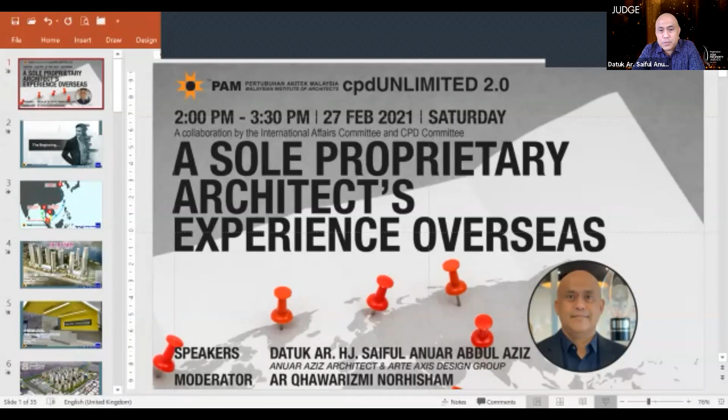Okay, thank you so much for the opportunity. I would have to say the opening remarks by Tan Sri Datuk Sri Isa is something we are all looking forward to, and basically you are our inspiration also in order to go overseas and open up our horizons. So I'll continue with the session. Basically, the topic is a sole proprietary architect's experience overseas. It might be a different experience because of the size and nature of the firm we are in. But let's start with the beginning.

The story behind how the projects came to us - we are basically based in PJ. The office has been in operation since the year 2000. Over the span of a few years, we were lucky to get the opportunity to move into a few countries within the ASEAN region. The first opportunity was in Phnom Penh, Cambodia. The second was in Qingdao, China. The third, which is currently an ongoing project, is in Mawlamyine, Myanmar. Unfortunately, with Mawlamyine, we all know what's happening in Myanmar at the moment, but we'll talk about that later.

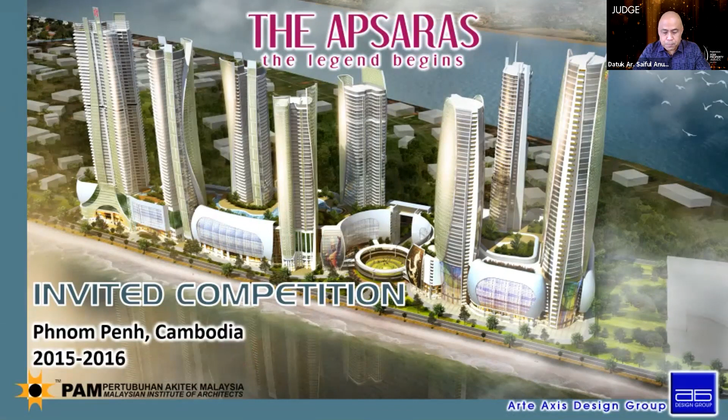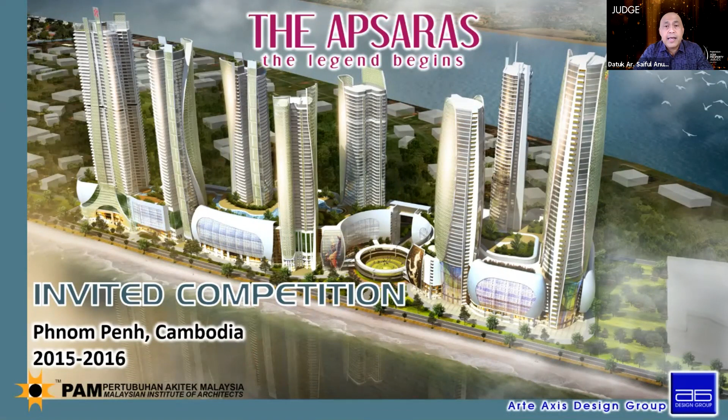How the project came to us for the first one in Cambodia is basically one of the most common ways foreign architects go into a country - by invitation to be in a competition. For this one, we were invited by the Ministry of Land Management, Urban Planning and Construction Cambodia, on behalf of Sokha Group, which is the developer as well as landowner. Behind the scenes, the first stage we did was before going in, to find out about what project is happening in the country, and we were lucky to get information about this particular project.

On the invitation, 13 companies were invited - half international architects coming from Europe, for example UK, France, and Northern Asian countries like Japan and Korea. From Southeast Asia, we were the sole architect company called from Malaysia, and another one from Singapore, and the rest are basically local Cambodians. The site visit and briefing was done in October 2015 in Phnom Penh. Like I said, this is practically the usual way of actually entering a new country.

The second one, in Qingdao, China, is an interesting process because we were introduced to the project by a local Malaysian contractor - so connections can come from anywhere. For this particular project, Immeri in Qingdao, China, it was through personal recommendation for an interior project. Immeri at that time was just established in October 2016 and is a fast-growing direct selling company. Qingdao was their first headquarters, and now there is another one in KL. Their market presence is in China, Hong Kong, Taiwan, Philippines, and also Africa. So basically, the way of us entering China was through the local contractor from Malaysia.

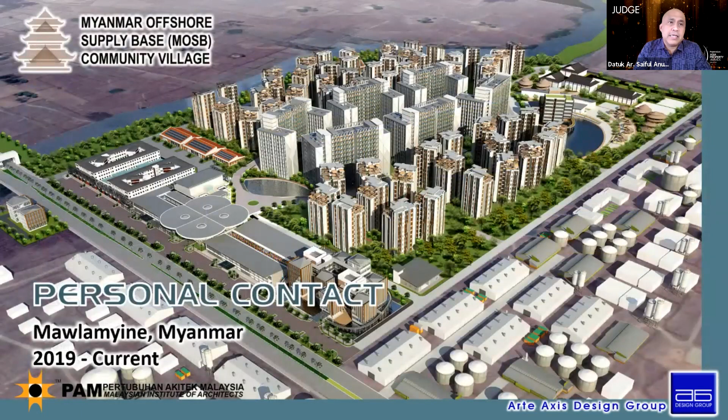The third, which is ongoing at the moment, is the Myanmar Offshore Supply Base, MOSB, which is a Singapore company. They received the green light from the Myanmar Investment Commission to construct an oil and gas supply base in Mon State, Myanmar. It was published in Myanmar Times - they are the first foreign-run oil and gas supply base in Myanmar. This project was actually brewing for quite a few years, and again, this was also through personal contact from a personal friend we've known for many years and someone we highly respect. So the projects we managed to get in touch with are slightly different from what we term as government-led missions overseas, but by no means lesser in terms of strength and the size of the project.

So this is a project which is basically currently ongoing in Myanmar. The first site visit was done in 2019, and unfortunately we had a fairly long inactivity last year, and there's also a bit of a coup happening in Myanmar. That's another story altogether.

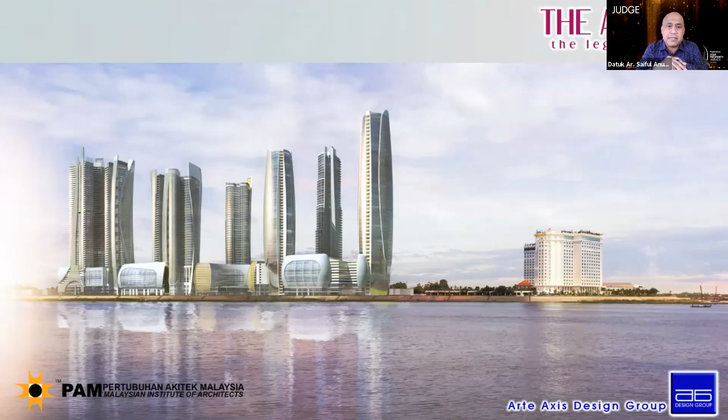Going into the brief, for all of these projects, the thing we have to be prepared for when going overseas is that we're not in our own comfort zone. For every single project we're doing overseas, the project comes with its own unique problems.

For the first one, the Apsaras in Phnom Penh, Cambodia, it was at a time when there was an economic boom in Cambodia, and this project is just one of the big projects driven by a local developer. It's termed as a mega multi-use development at Koh Pich Riverside shopping complex, on an island, which I'll explain a bit later on.

The reason the ministry is involved is because the project is deemed as national interest, so all the designs and deliverables are basically controlled by the ministry. The main components are shopping malls, service apartments, hotel, and corporate office.

But the subtext of the project, which is also very interesting, was that the ministry also desired improvements such as viable solutions to their water woes and sanitary systems. They're looking at this project as a pilot to improve infrastructure in Phnom Penh, and later, if successful, it will be utilized everywhere else in Cambodia.

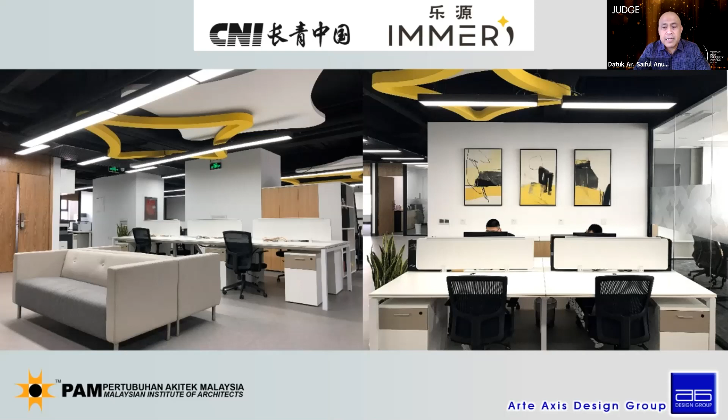The next one, going back into Myanmar, in terms of the brief, the project is again completely different in nature, although at the end of the day the components are perhaps recognizable. But the brief that comes with this is very challenging.

The idea is basically to create an offshore haven, if you like, for people who have been staying on oil rigs for 30 days, to go into this area and off to another place. If anyone is familiar with oil and gas operations, personnel going into oil rigs basically have a maximum time of about 30 days.

The reason being the condition of living, psychologically and physically, humans are not able to move beyond this kind of time frame. So after 4 weeks offshore, they will stay in this resort for 3 days to recuperate, to retune their body physiology and psychologically before they move out of the country for 2 weeks, and after that they come in again, and the process proceeds that way.

So this offshore supply base community village becomes something like a test case, where they should be able to heal in a way, get back into their rhythms before going to their families, and also psych themselves up before going back into 1 month of staying on the oil rig.

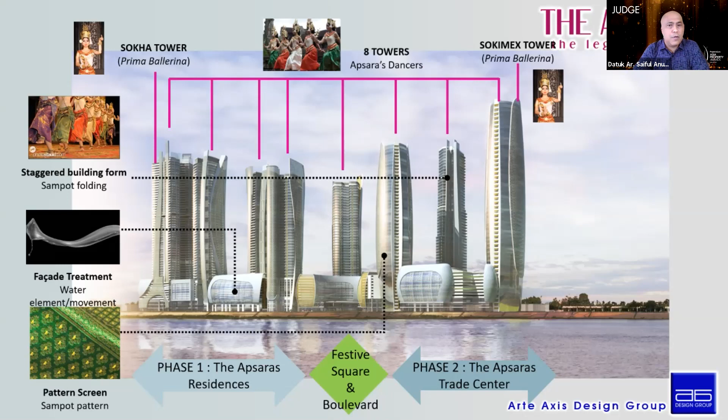So basically, the silhouette that we are doing is reminding the nation. This is the view towards the building that will come from Phnom Penh proper, which is where most people would stay, and you'll be looking at a new building, which is in a way a reference back to their own culture.

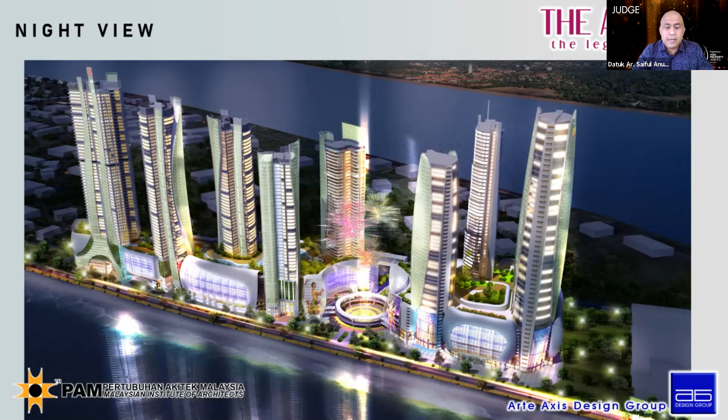Apart from that, I would say their brief was incredible, and I personally think that during that time it was highly ambitious, because to come up with this proposal, we are also looking at a massive investment from their side, not only in terms of building works, but also in terms of improvement of infrastructure.

But in compiling and getting into compliance with the requirements, we followed up with designs based on salutogenic design, and also in terms of whichever technological advances we can bring in terms of knowledge from Malaysia to Cambodia.

After looking at Cambodia, the CNI Immer project is much more straightforward. It's a purely interior project where we are dealing with the culture of direct selling.

So in this way, we try to absorb the kind of outlook that they are looking at, in terms of how to motivate mainland Chinese to join Immer, and also to be able to do the things they're supposed to be doing, which is basically multi-level marketing.

So the image is very much more, I would say, pop art in a way, but that is something which is very relevant at that time when we are doing this project in China.

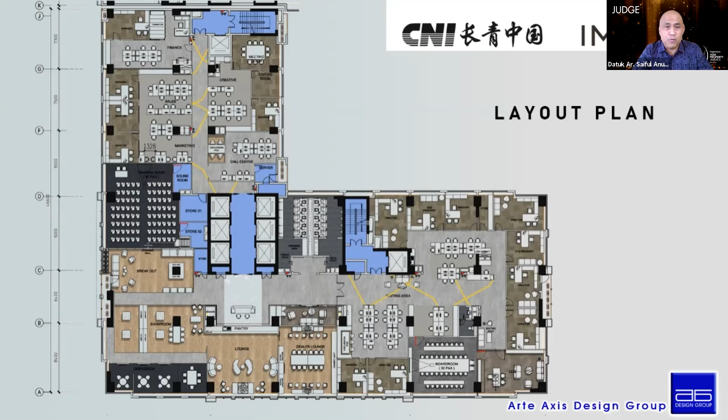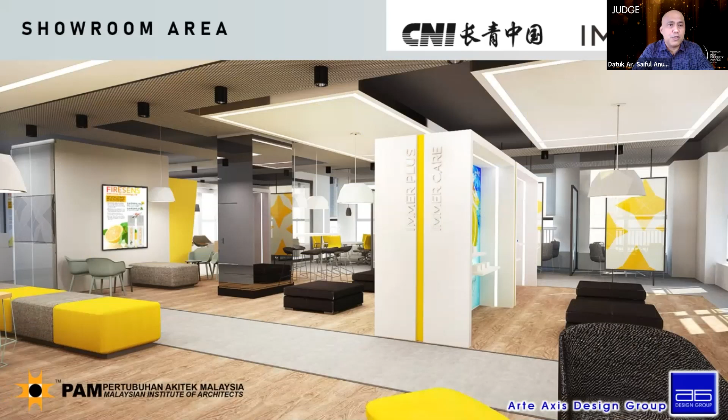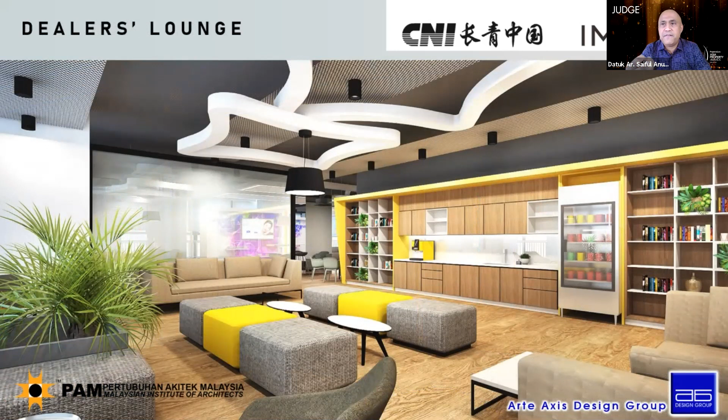So the colors are Feng Shui based. There are also different elements used in order to portray movement and technology, and a repetitive kind of decorative element derived from the logo. This is the kind of thing that pulls all the designs together.

And interestingly, what we did then was basically to specify everything in Malaysia, and this project was done in record time. From the initial stage of designing up to completion is only 4 months, and this is one of the things that a smaller company perhaps can do, which is basically to do things in Malaysia and find a good collaboration with a local contractor overseas.

And that's what we have done, is basically to prepare all the documents, everything done in English, and send it over to China. Within a few days, we were told to come over and look at the drawings and specification, which is completely translated into Chinese by the developer and by the contractor. And we were asked to check whether it is correct.

So we were lucky that our project director is Chinese and he can read and write Chinese. So in that sense, what he was saying was technically everything was translated perfectly. So whatever material that we have specified in Malaysia, they managed to get an exact replica or equivalent in China. And from the initial drawing, the perspective to the finished product is basically very much similar.

So moving into Myanmar, going again into this area. So this is basically the whole area which we are looking at. The whole project is about 500 acres. Most of it is basically taken over by the offshore oil and gas supply base. Basically, it's a very technical project.

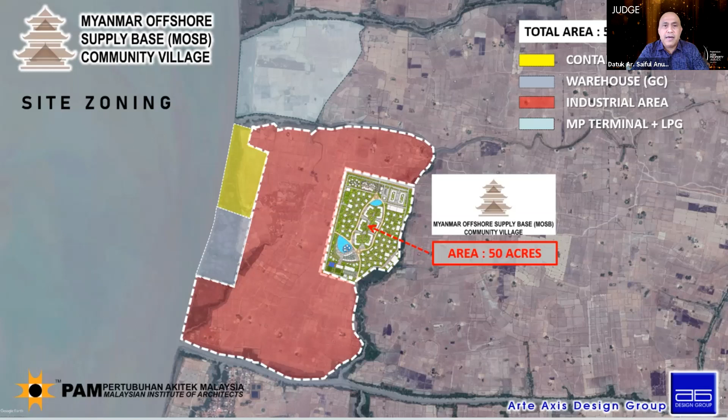The surrounding area here, unlike the project in Phnom Penh, this area near Mawlamyine is very, very rural. In Cambodia, we have to deal with intermittent floods whenever Tonle Sap Lake is submerged. In this particular area, we're looking at about 4 months of submersion per year. So we were working with Sembcorp Jurong trying to find out how to basically make this project sustainable, bearing in mind that we are having these issues of flooding happening 3 to 4 months per year, around this area and also near the Yangon areas as well.

So it's a typical story of projects. I think whoever has dealt with projects in Myanmar would probably know the issue.

So in terms of the project, a very quick take: the layout that we have done basically comprises areas where people stay, where we have interaction between local people and the base. For example, creating fruit orchards that locals can actually grow and the owner or the tenants can actually use. Shops basically either to cater for a normal Western, or I would say the more developed nations' taste in terms of food and recreation. It would also cater for local public in terms of fast kind of shops and also medical equipment. So those are basically the CSR portion that also needs to be catered for.

So I think for this particular project, we've been working on it solidly for a year, and the design has been revised again due to the pandemic. I think probably by the time we actually start looking into the actual construction on site, we might even have to go another round of changes due to the current situation.

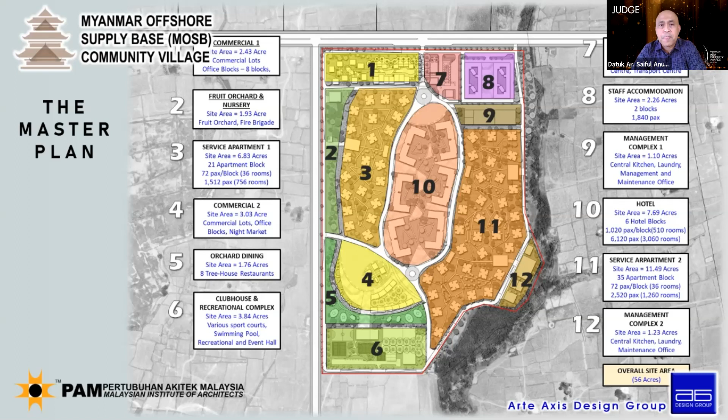So this is the basic feel of it. It's going to be done in stages, for a population of about 10,000 people, a transient population. Basically, the showcase is looking into a traffic-free environment within the 50 acres. All vehicles coming into this area will have to be parked outside the area. It will be a very green zone.

The movement is basically through electrical buggies, and in terms of operation, we came up with a proposal that everything will come through a centralized kitchen and operation, where everything else—for example, food, F&B, and the maintenance of hotels and service apartments—will come from remote points.

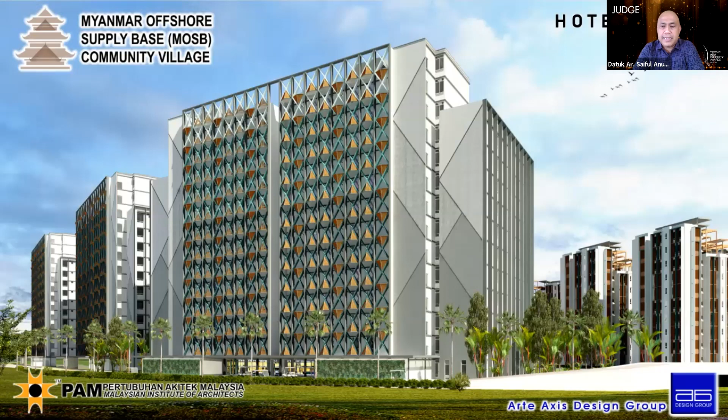So we have this idea of a building system we call the Asia system, where even in this particular project we are looking at a separation of different components that can be plugged in and out of a building, because at the end of the day we are looking at maintenance being done by locals. Products coming in from Thailand or Malaysia would be too far away. This particular office complex was, in a way, a reference to the conditions in that area.

...during the 4 months of flooding. So what you see is basically water—this is the toddy coconut tree—popping up from the flood water is a very common view. This particular office complex for the oil operators is done as a reference to what they probably experience for some months of the year.

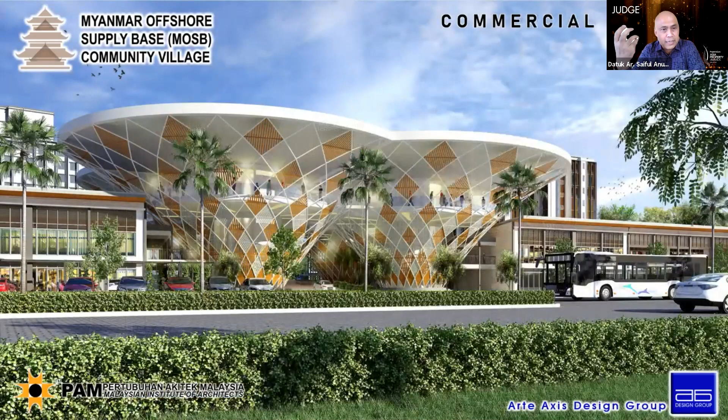Sometimes we were looking at this as an opportunity to actually create something which in normal circumstances might be difficult to create. For example, in Malaysia there will be building regulations, bylaws, and fire requirements that don't allow certain buildings to be built to the specific ideas that the architect wants.

Also, working in Myanmar, we were specifically told to use local products. We are more than happy to use all the teak that we can—obviously it has to be sustainable—but we were also told to lower the level of technology, because we need to give a lot of jobs back to the local population, the Mon State population. Mon State is not among the richer districts in Myanmar; they're further south, quite near southern Thailand.

So when we were doing all these components, we looked at using local materials, local technology, and working with local engineers in Myanmar, because another requirement is at least a working knowledge of earthquake design, complemented by the earthquake scenarios in Myanmar.

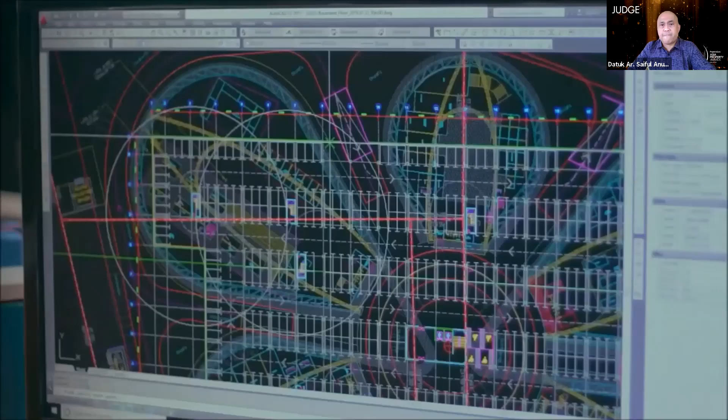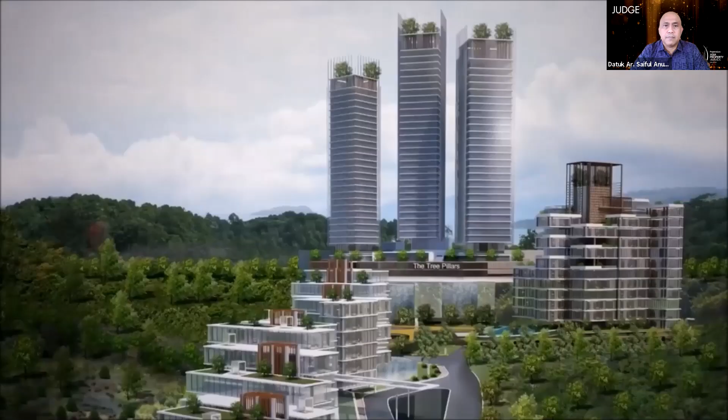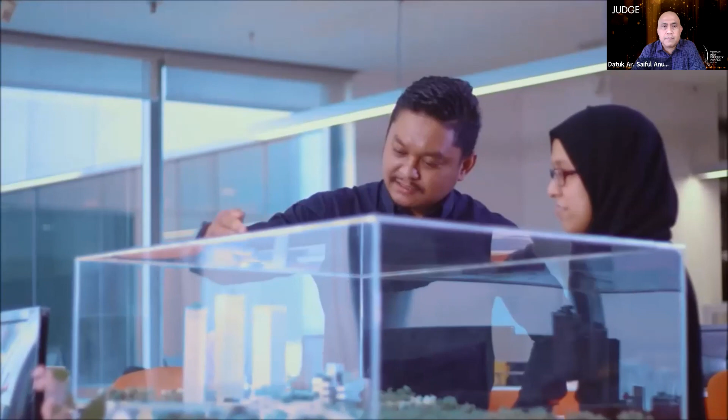For centuries, humans have been known to create amazing structures from the simplest of resources. We have come a long way since then, but the fundamentals have always remained the same. Founded in the year 2000, Arte Axis Design Group brings you modern concepts and aesthetic products, driven by a philosophy of design excellence. From master plans to institutions to residential projects, we believe in offering creative and innovative architectural design solutions, combining great design with functionality. Our portfolio of works is diverse in terms of size and complexity. We're constantly exploring and testing new ideas because styles come and go, but good design is language. Our works are recognized globally through national and international design awards and publications, a novelty amongst Malaysian architectural practice. And here at Arte Axis Design Group, we dedicate our lives to designing structures that leave a lasting impression.

Basically the reason for this is whenever we're going overseas, there will always be competition - firstly usually with the local architects working in that country, and also the plethora of different outfits coming in. As Tan Sri was saying, there were a lot of architects - for example in Malaysia, foreign architects coming in with packages that go beyond architecture. So whenever we're going overseas, we have to compete to do the same thing in order to compete.

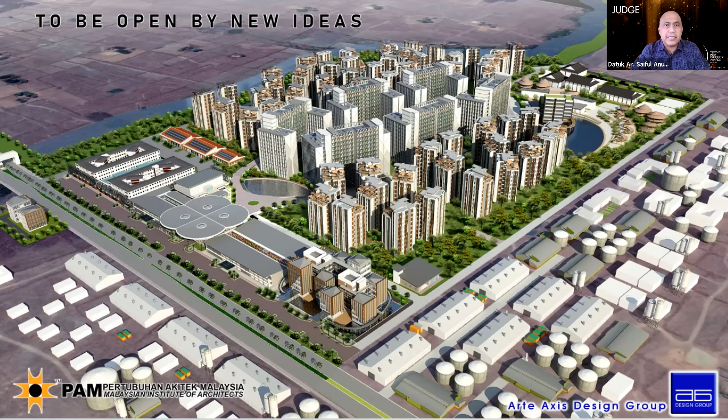The takeaway from the Myanmar project is that initially we were thinking of just doing the architectural portion, based on a typical brief from the client. But towards the end, after working with them for about a year, we realized we had gone beyond architecture in a way we never imagined. We were looking at psychology, at landscaping in a way that is healing, and we needed to think beyond the comfort of creating simple hotel rooms, service apartments, office spaces, or retail spaces, into environments where people can actually heal, using Myanmar itself as a reference. Our client has been told that, if done right by a collective group working together to make this a reality, it could propel Myanmar forward in terms of technology and also in embracing ideas from another country into their built environment.

So I think sometimes it comes with an obligation to show what nations can do, but also what nations must do, in order to establish ourselves overseas. On the other hand, if there's anything we can bring from Malaysia over to these countries, that is, I would say, a noble thing to do.